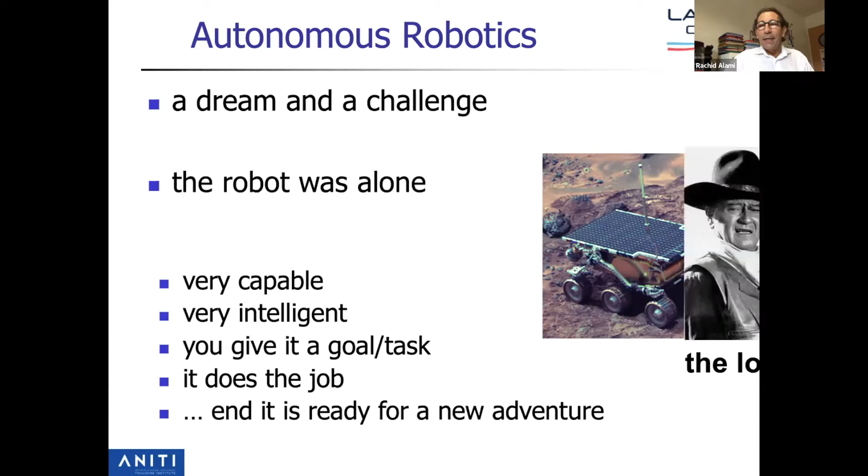And the idea was that the robot was alone, like this one, for example, alone and far and isolated. And we wanted it to be very capable, very intelligent, of course. And the idea is you give it a task or a goal without too much detail, and it will solve the problem and do the job, and then it will die in the mission or be ready for another adventure. It was this kind of robot, of hero.

The lonely hero. But now there is another kind of robot, the robot operating in human environment. And I will try to convince you that it's a new era of inquiry, because we are going from robot tools that are doing things for us to robots that are doing things with us. And the issue here is to understand, to implement, to deploy this social side of the robot. I put social side between quotes so that we can discuss about it.

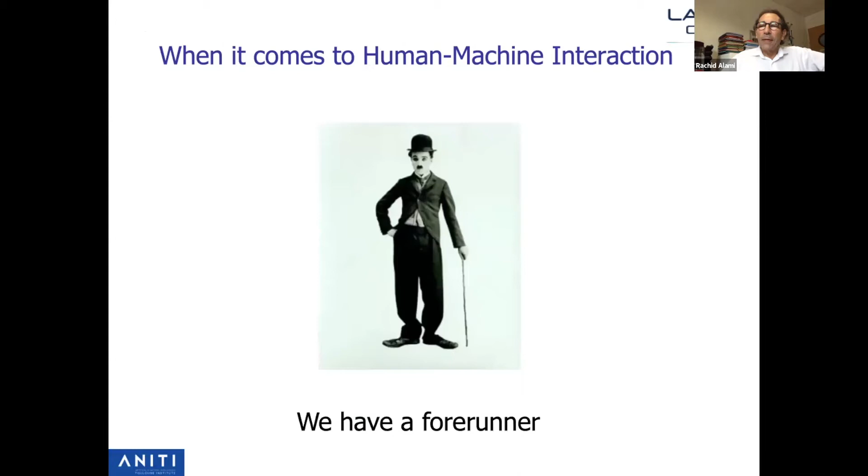And now, when it comes to human-robot interaction, and this really happened to me when I started to work on this, I thought we have a forerunner, and this forerunner is this guy. Why? Look at this.

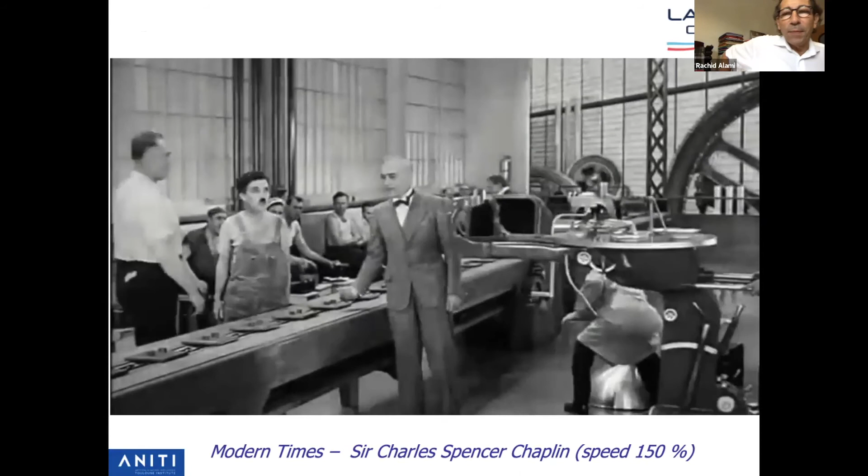This is a kind of mobile service robot that is used here to deliver a task, to perform a task. And what you will see are all the problems that we have, all the things that we should not do. We explain to the human in detail, we calibrate the human to do the task, as you see. And now the robot performs its task.

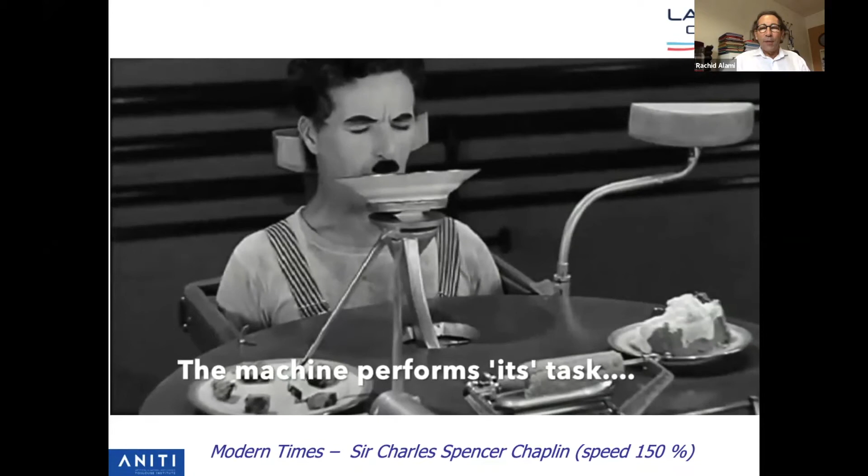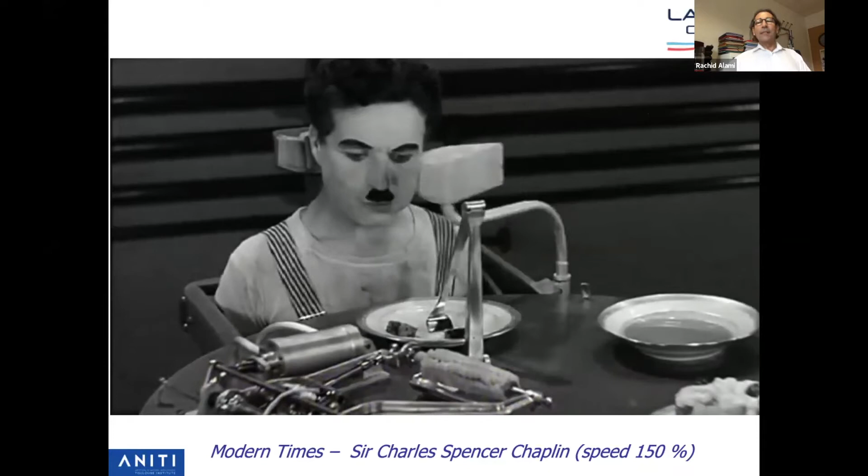It surprises the human from time to time because it's not predictable. It has its own rhythm, and the human has to comply. The human is still surprised from time to time by this rigid sequence that seems good a priori. The task is good, but the machine decides by itself what's next, what's good for him, for this guy. This is a proud engineer, always proud. It's an issue also, and there we see a number of problems now.

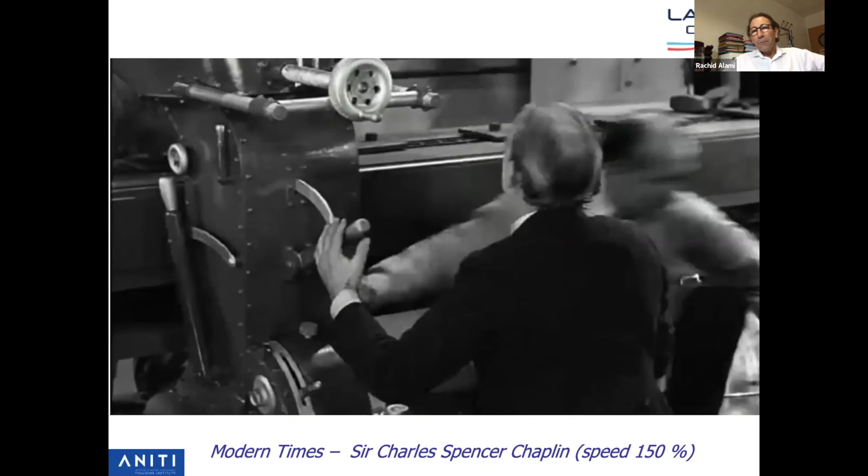You will see that speed is not adequate in some situations. You could see also that something happened here - calibration problems, perception problems - but still the high-level task is still working. There is an issue of acceptability, perhaps. Yes, there is. And well, perception was needed, it was not there, but still, you see, the high-level task is still working.

The protocol, the high-level protocol is working, but now consequences of small details of errors can be quite bad. But the high-level task is still working. And then, of course, you have the finale - the fully autonomous machine, but it's not what we wanted, of course.

So I found out also that a number of young people do not know this video, this film, so I show it. It's Modern Times. It's very interesting because it was shot between '32 and '35. The premiere was in '36.

And you can see in it a number of key issues we are dealing with in human-robot interactions today that were already mentioned there: the issue of proximal interaction - human and machine really working together, sharing space. The issue of initiative taking - who is taking the initiative? Issues of adaptation to humans. Issues of pertinence of choices and decisions - who decides what is pertinent? Reliability, of course, fault tolerance, safety, etc., etc.

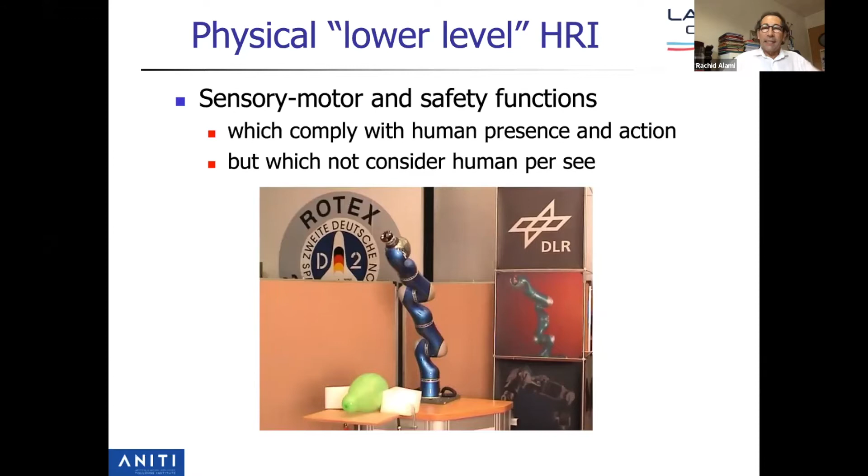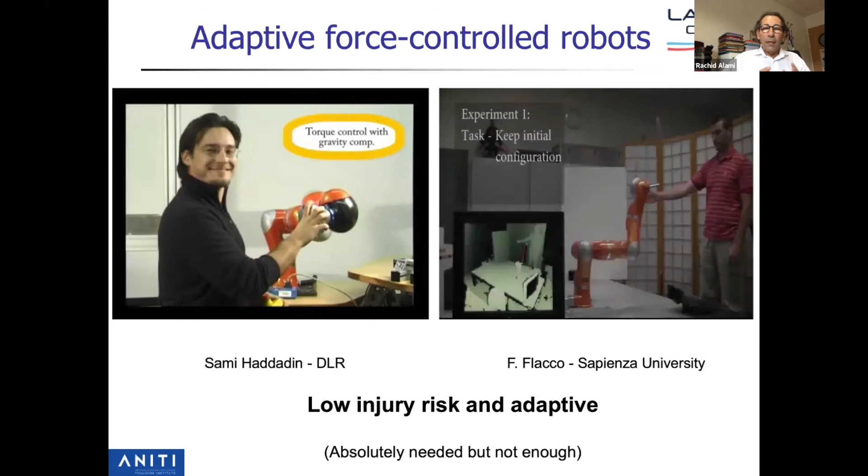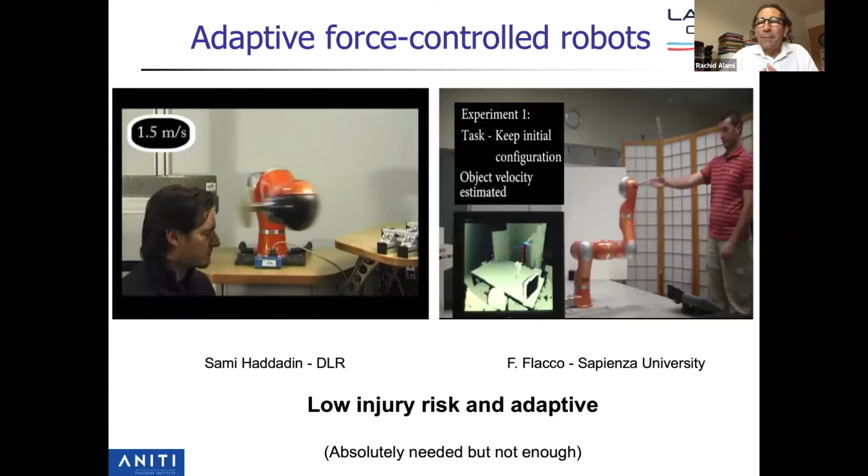I'm not speaking about the low-level HRI, the sensory motor functions. These robots today exist, and this is absolutely necessary. I'm giving here an example of a robot that is able to reduce injury risk and adapt. This person is Sami Haddadin, he is a full professor today in Munich. He is still able to answer simple questions, even after that - he's a good friend of mine too. But now what is interesting is that this robot today, we can really put the human and the robot together and make them share the environment, because they are already sufficiently safe for that. But this is at the low-level sensory motor level, not at the decisional level.

And now we are going to our topic. The topic is basically this: building an integrated approach that will allow us to incrementally and progressively build a coherent framework for joint human-robot activity, where the robot will take the right decisions and behave in a way that, as I said, is pertinent, acceptable, etc.

Very, very interesting, and it's interesting to read again these papers.

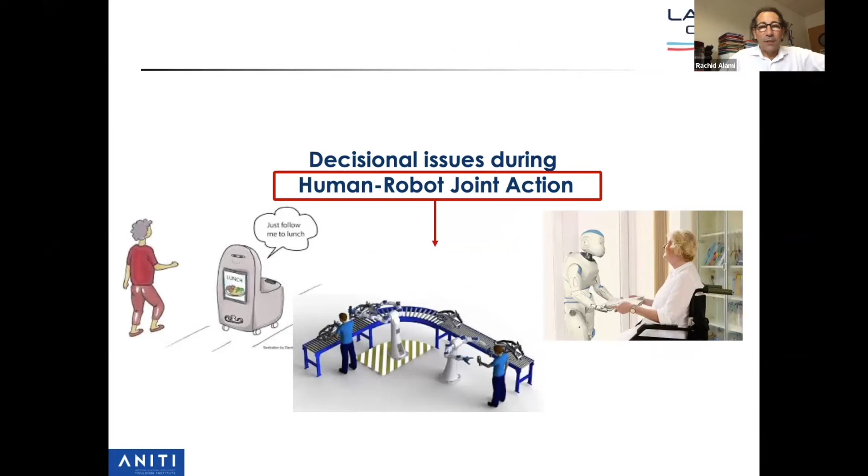We want to introduce the robot in the game, okay, and so the robot having to perform joint action, achieve joint actions with humans in different contexts. The question here is, how are we humans able to collaborate successfully, and what is necessary to introduce in the system so that the system becomes a good partner somehow? We are very good at detecting good and bad partners, as you know. So this is the challenge of building decisional processes for this kind of robot.

There are a number of studies, of course. There are issues linked to the high level task planning and decision level, the low level refinement and shared proximal execution, when time becomes constrained and space becomes constrained. We are also very good ourselves at detecting when we simply need to coordinate and when collaboration is necessary. All these issues are important when we have to build this kind of system.

This is the architecture, a kind of conceptual scheme that we use, that I show to my students when we start the work. We have a task to perform, something to do with the robot and the human. What we want is for it to be performed in the best possible way, which means efficiency, of course, safety also, but also acceptability, intentionality and legibility.

What do you have here? You have your human and the robot. There is a task in between. There is mutual multimodal dialogue between them, okay, gesture, speech, etc. There is also, and this is key, mutual observation. The robot observes the human, the human observes the robot, and the robot knows or reasons on the fact that it is observed. Very important: the robot reasons on the fact that it is observed.

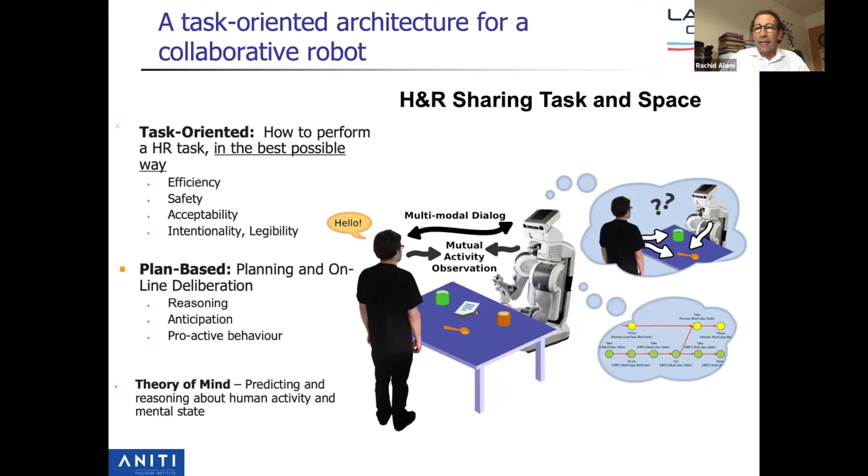So my work, what I have done with my students, and then I will give some examples, is a constructive approach. We are trying to build things, essentially at two levels: situation assessment and interpretation, and the level of synthesis of robot behavior, developing planning and motion, task and motion planning systems. The first aspect is linked to simply understanding and interpreting correctly the situation. I will give some examples. Of course, in 30 minutes I will not have time to go into details, but I will give a quick overview of some of the results.

How did we work? In fact, we essentially worked on different ingredients that allow us to build incrementally and their articulation to build a system. We worked on the control architectures.

We worked on specific topics like human-aware navigation, which means navigation taking into account human presence, human-aware manipulation, issues linked to affordances and how to reason about affordances when performing a task, affordances open to the robot but also to the human. Perspective taking is a key aspect because it's the basis to build a theory of mind system. The robot has to reason on the perspective of the human and put itself in the shoes of the human.

And then we worked also, of course, on high-level planning, like human-aware task planning, and also how the robot should cooperatively achieve a task with the human and coordinate with the human.

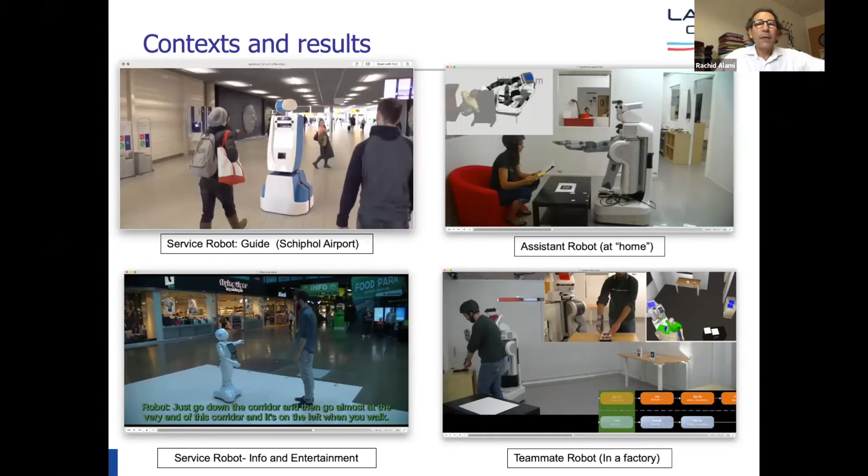And we have applied this in different contexts, like this robot guide at Schiphol that embedded effectively a number of these abilities: an assistant robot at home, a robot performing some kind of information and entertainment, but also a teammate robot in a factory. Of course, this is a factory in the lab, but we have worked with industrial partners in order to have a realistic test bed.

Under the hood, there is an architecture. There are components that are combined and articulated. I will not go into these details. There are papers on this in which one can see.

I will simply give examples, and the examples are essentially oriented about the models. Why? Because permanently the robot in this kind of situation has to ask itself what to do, because sometimes it's not the robot's turn—it's about what to do now, okay?

Who will do it? Sometimes it's the robot, sometimes it's a human. Where to perform a task seems simple, but it's very important. When also this is clear, and how. The how is really an issue because there are many ways to perform a task, and some are far better than others, and I will show some examples about this. And this happens at different levels of abstraction with various time horizons.

And the issue here, as I mentioned, is the quest of models. So I will show some of these models that we have worked on.

These models allow us, once we have them, to do cost-based human-aware task and motion planning, to look at this issue of mental state and embedding communication and legibility into the action, and also to reason about what the robot will do, but also what the human would like to do and can do in the interaction.

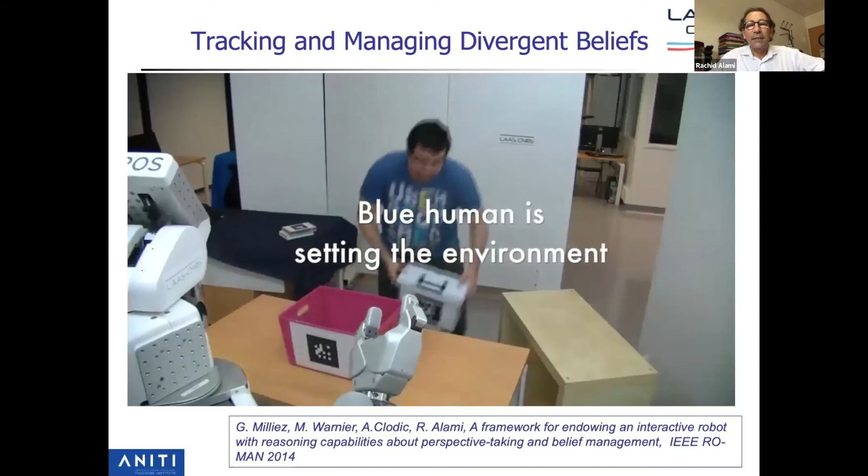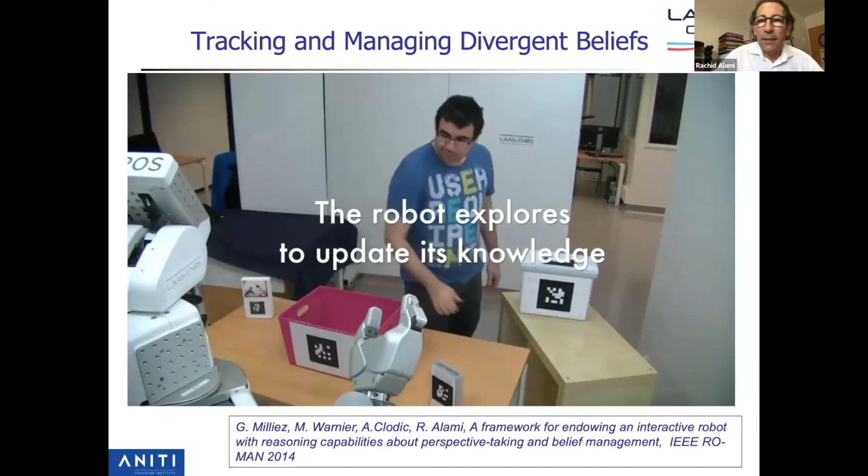What you will see here is that perception is simplified. The robot is simply looking at tags, and from this building a 3D model of the environment that will appear on the screen. Now you see the robot is able to build the model of the environment, track the human, and recognize the object.

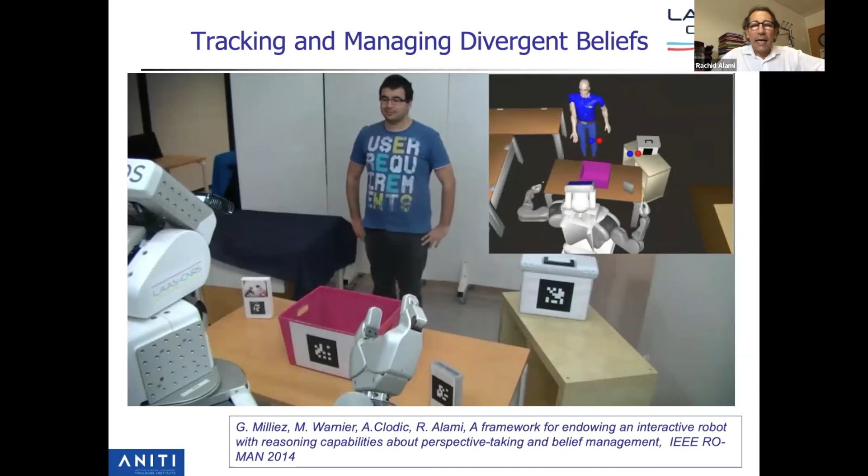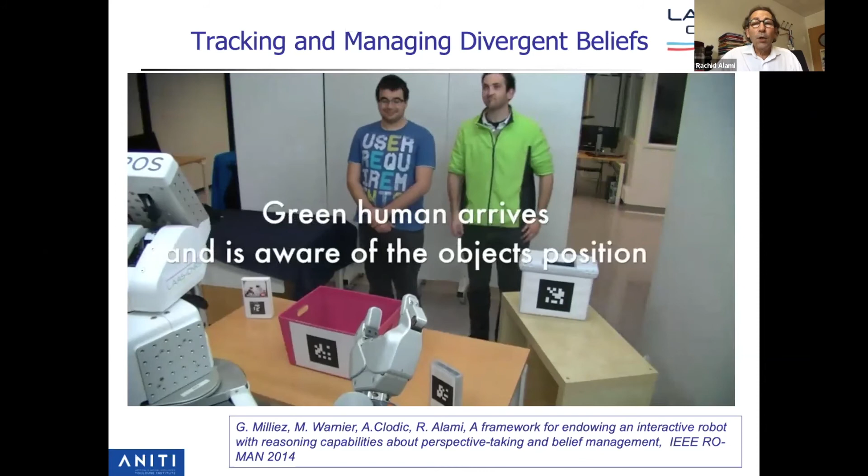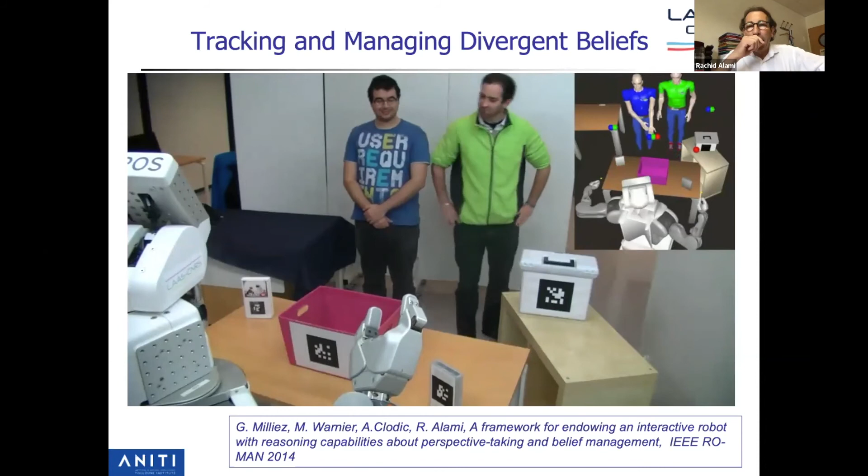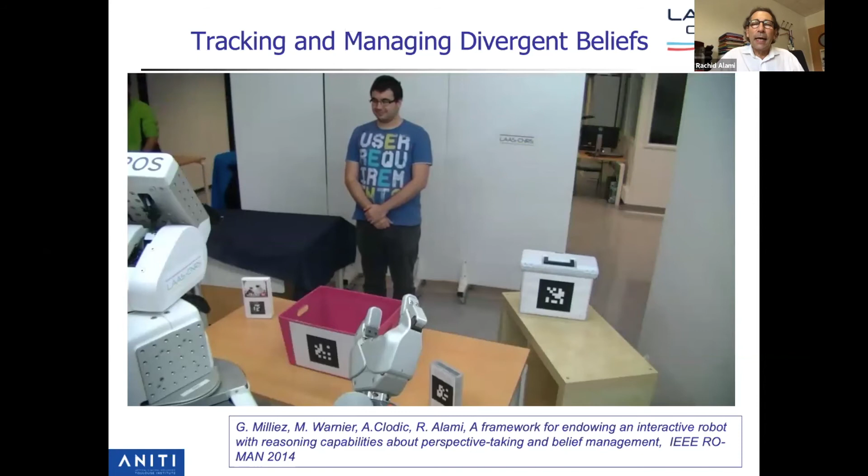What will happen now is that the robot will also build the perspective of the human, because it knows where the human is placed and where he looks. Now a second person comes, green, who stands almost at the same place, so the robot computes an almost equivalent point of view for this human. Okay, they see the same objects. The robot is doing this and building this set of facts and beliefs associated with each of its human partners. Now that green has left, blue will do something that the robot will observe.

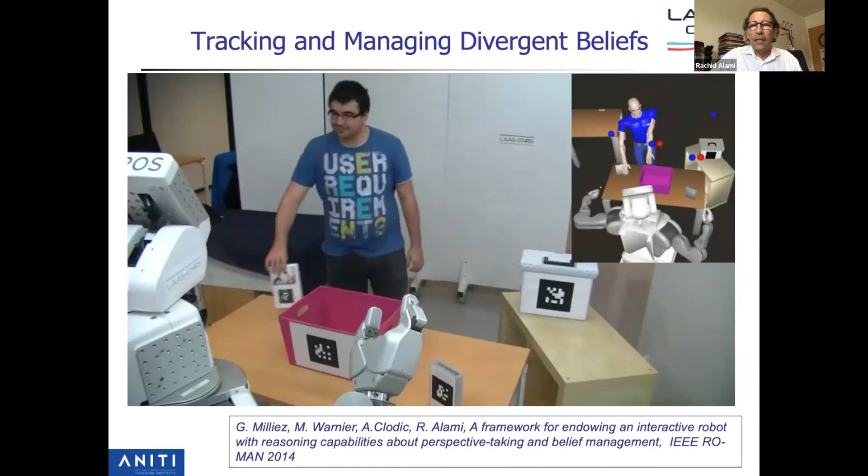As you see here, blue will take this object and put it in a place where it cannot be seen by green if green comes back, okay? See, the robot builds—you can see at the right that the robot updates the environment. It's a little slow, but I'm letting it run here in normal speed.

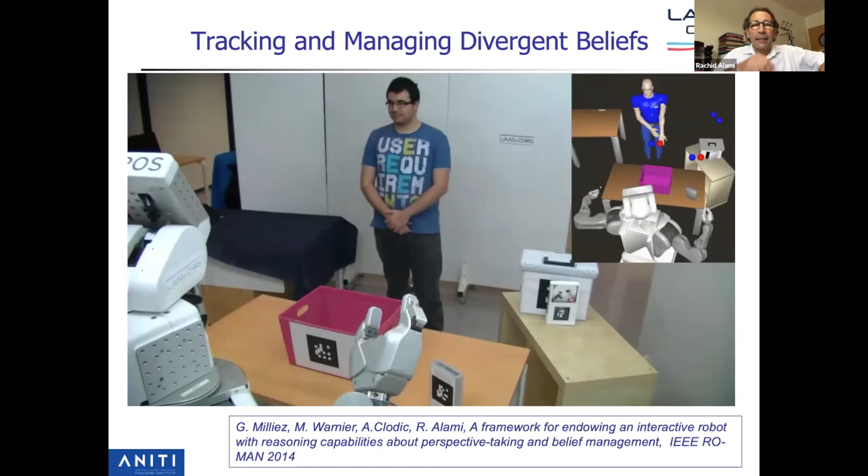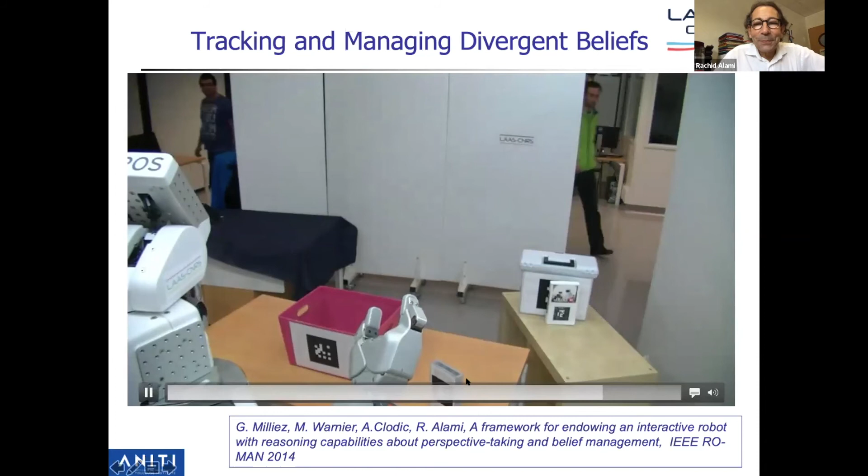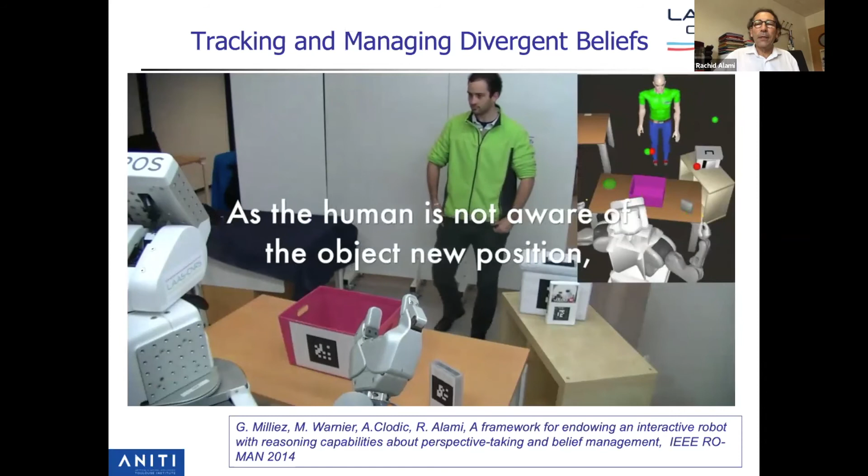What is interesting here is that when green comes back, it will come—it's a little slow, sorry—the robot will be able to infer a number of things, okay? First, that green will not find the object that was on the table, which now has become the green sphere. And also... oh, it stopped, I don't know why. It should not have stopped. Sorry, there was a small problem.

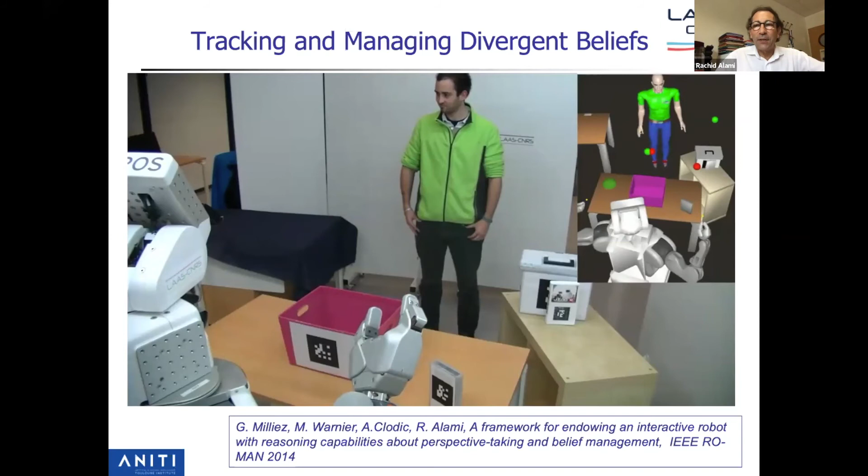What is important here is that it's running now. I don't know what happens—sorry, okay, I will move this. Essentially, the robot will conclude that the guy is not seeing the object because it is not in his field of view, but still the robot will be able to plan, if needed, communication actions to inform the human about where the object is, if it's needed for the task.

This allows the robot to reason about the perspective of the human and to integrate this into its planning and reasoning when necessary. I have another example that I will skip here that shows this very quickly.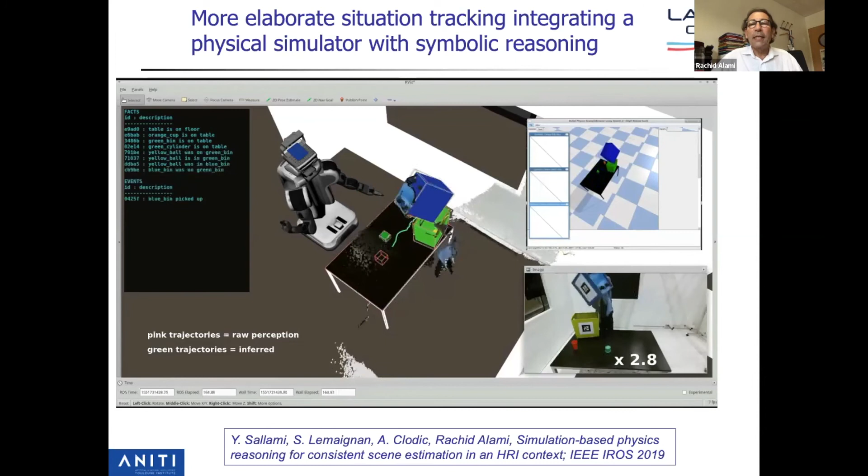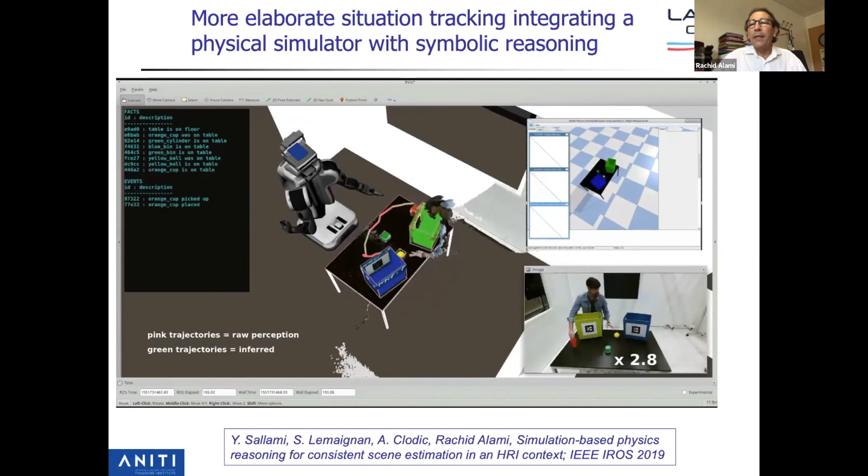I will show it here. The robot is using a physical simulator in order to infer what will happen with the yellow ball when it drops from the blue box to the green box, even while not seeing it, simply by inferring using a physical simulator. So the robot is able to track objects that are not seen if it uses a kind of physical simulator. Having this, the robot could have a sufficiently accurate estimation of the state of the world and beliefs of the human, in order to perform actions like giving an object to a human in a place that is visible and reachable to him, etc.

I will switch this, because of time, to go to a second aspect, since I see that I have only 5 minutes more.

Elaborating a shared plan: the issue here is that in some situations, the robot has to plan, of course, but also has to estimate what will be the contribution of the human, when there is a shared goal between the human and the robot. For example, when the human gives an order to the robot, there is a shared goal, or when they negotiate a shared goal. What is interesting here is that we do this essentially by allowing the robot not only to build its own stream of actions, but also to estimate the stream of actions of the human. This is a kind of shared plan, and it is done also using cost-based reasoning in order to reduce the load on the human and to facilitate the human's work.

There are other issues here, done essentially in a hierarchical way using an HTN approach. What is important is that in some situations, these two plans are equivalent in the sense that they solve the same problem, but in one of them the human will not have to wait for the robot. It's important for the robot to know this so it doesn't make the human wait. It's better for the robot to wait for the human than the reverse.

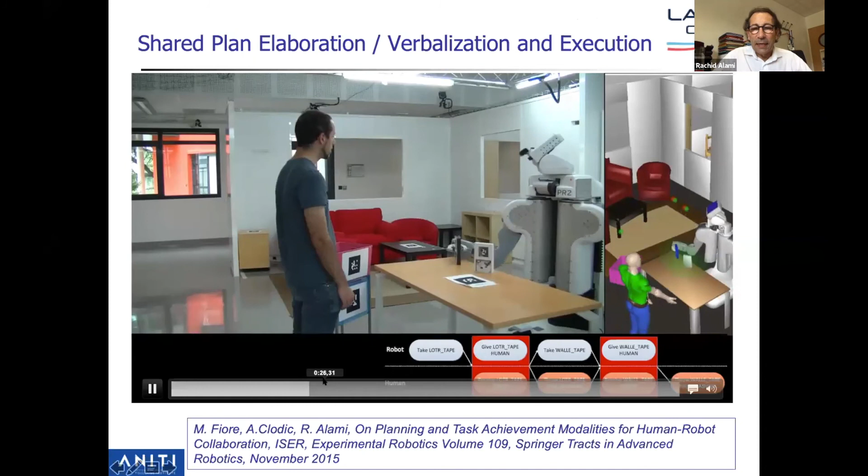Of course, there are social interactions that could be introduced when choosing the good plan. This is another example where the robot builds a plan and verbalizes it, adapting it to the execution of the human.

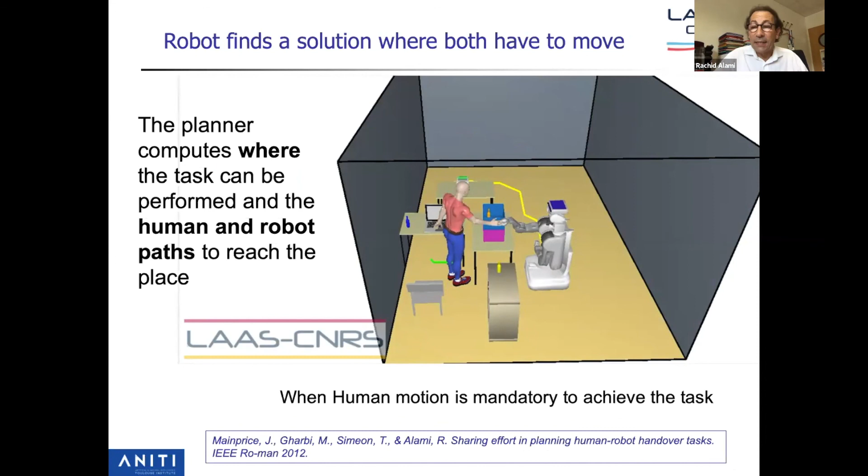Now there are situations where the task has to be shared. It's a simple handover, but in some situations the human cannot reach, so the robot has to plan whether the human needs to move to a place where the handover can happen. Here the robot decides or proactively proposes where to perform a task, based on hidden computations about accessibility and comfort of the human, which can be introduced in the model for cost-based task planning.

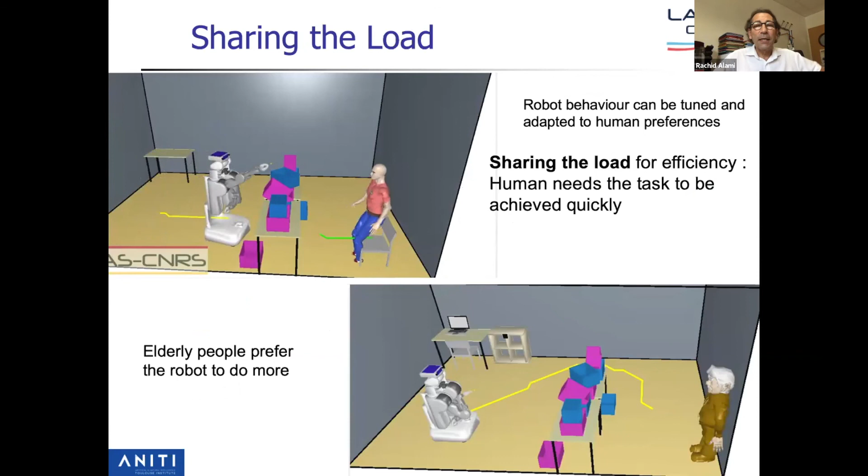With this, you may have situations where if you have a strong guy who is in a hurry, the robot will hand over the object just like this. And if you have an old person who accepts the robot being intrusive, the robot will behave differently. This is important because you have to equip the robot with the ability to balance between these aspects.

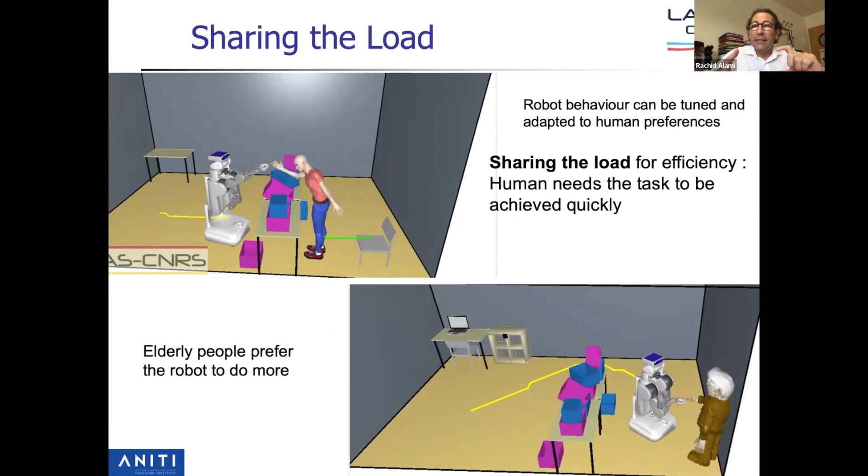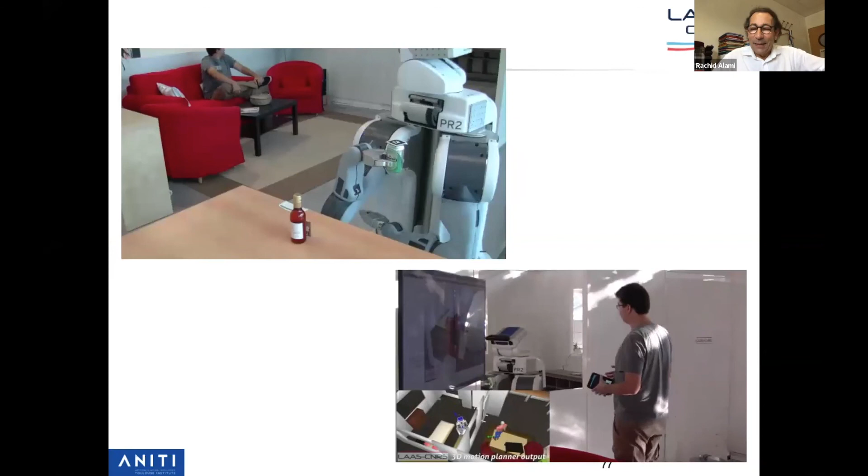I'm sorry, I have to almost conclude now. Yes, so I will... How can I help you? Okay, sorry, I will stop here and switch to the conclusion.

This was another example showing the robot, though I won't show the details. The robot is computing the perspective of itself and of the human to guide him, choosing a place where they both can see a landmark before discussing it. This also assumes the robot is able to compute these abilities.

As you see, I've covered a big part of my talk concerning these issues of building a good plan. There are a number of issues behind this linked to legibility, communication, compliance with conventions, and now I'll go directly to the conclusion.

Yes, I think so, I think so. It's more reasonable, which is the following. Okay.

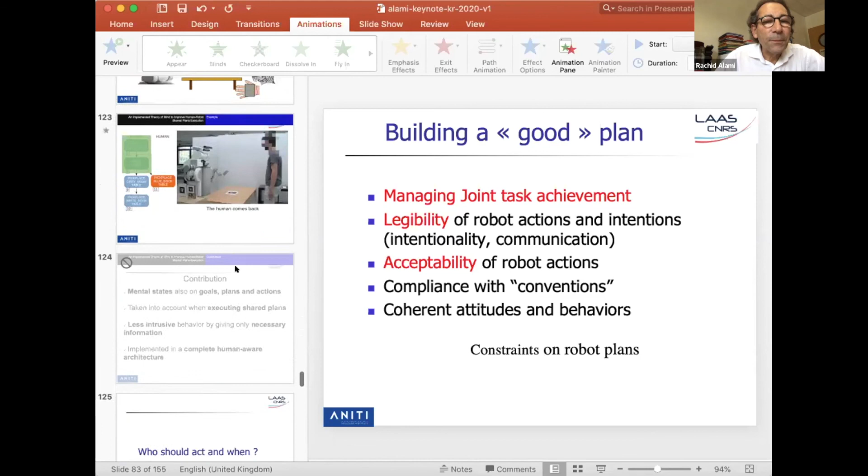On these aspects, it appears there are still a number of very interesting problems to take into account when building this kind of robot. I mentioned issues like mutual responsiveness, elaboration of plans that permanently and reactively satisfy the goals of the humans, and the key notion of commitment. The robot not only has to commit, but also ensure and manage the commitment of its human partner, as well as consideration of human needs like various preferences. Even limited to contexts like fetch and carry, interactive manipulation, and associated tasks, this is still very interesting and covers a number of pertinent issues.

I want to mention this because my idea was essentially to convey these issues of models and criteria for planning. These are criteria we have taken into account: some are cost-based, like proxemics, visibility, effort; others are constraints; others are properties a plan should satisfy. I'm showing the ones we have effectively taken into account in the planners we built: proximity, comfort, acceptability, legibility, and time.